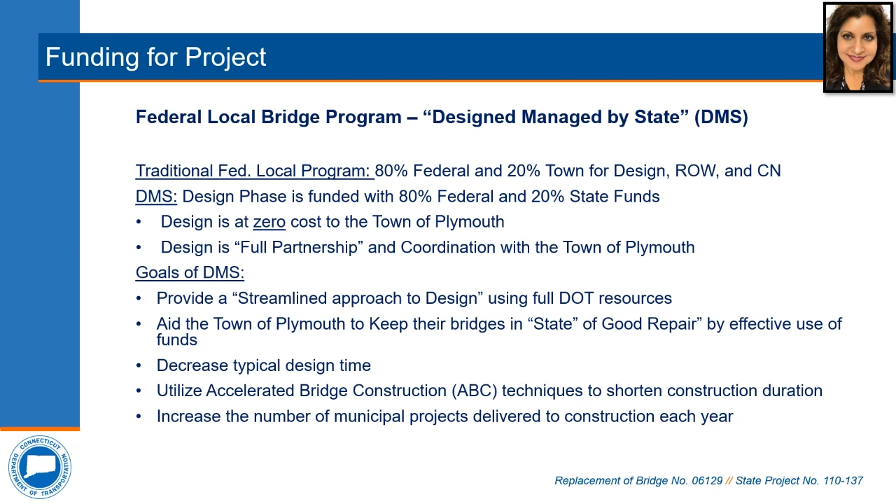While the Napco Drive Bridge may not presently be your vision of a bridge, it does meet the size requirements to be considered a bridge. Therefore, the Connecticut Department of Transportation performs safety inspections on this bridge every 2 years. The Napco Drive Bridge was flagged during those inspections as one of the bridges in town needing repair. We knew that the bridge needed to be completely replaced and were looking for the most efficient way to proceed.

Traditionally, the town would have to hire a consultant to develop the plans and then navigate through the design process, with the town covering 20% of the design cost. As Preeti mentioned, the Department of Transportation offered the DMS program to the town. We started talking with the state in February of 2020 to get an understanding of how the program worked and how it may benefit the town.

After several more meetings with the state, the town recognized this would be a good joint effort and agreed to move forward. We felt it was a win-win solution for the town since the state pre-selected consultants who would have a better knowledge of the design process, resulting in an early completion of the design and construction, not to mention cost savings. Over the last year and a half, a lot of information gathering and preliminary design has taken place

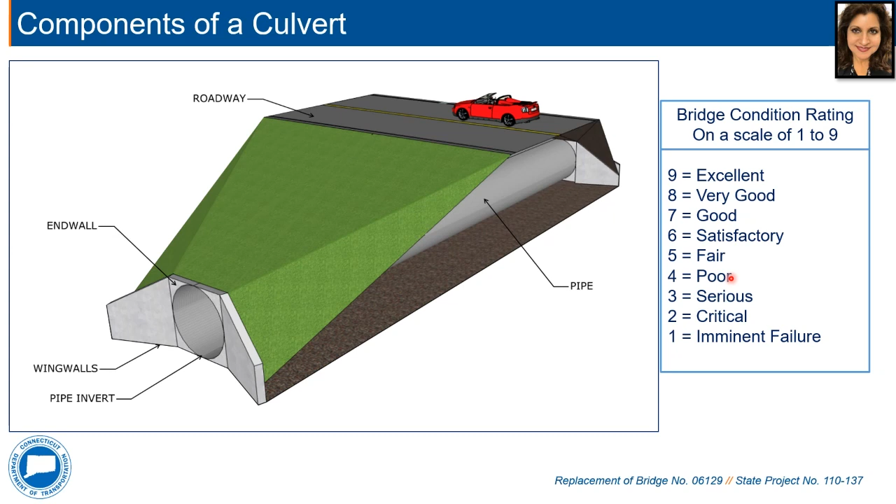Thank you, Preeti. Good evening. My name is Sean Ladowdy, and I will be presenting the technical portion of tonight's presentation of Bridge 06129, Napco Drive over Pequabuck River in Plymouth, Connecticut.

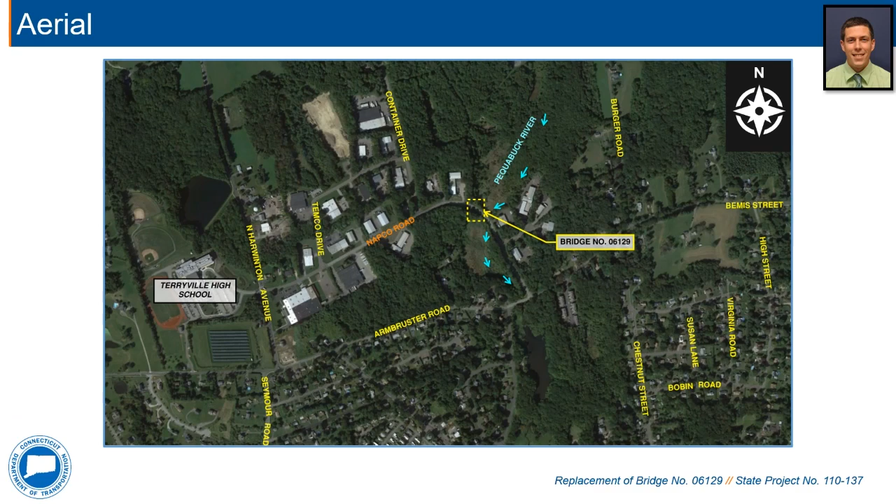Here is an aerial view of the project site showing Napco Drive, the Pequabuck River, Terryville High School, and the surrounding streets. This slide depicts a plan view of the existing bridge. The Pequabuck River is shown in blue, and the existing bridge is shown in orange. The Pequabuck River is the main branch to the east, shown here.

A tributary connects the river just upstream of the bridge, which is shown here.

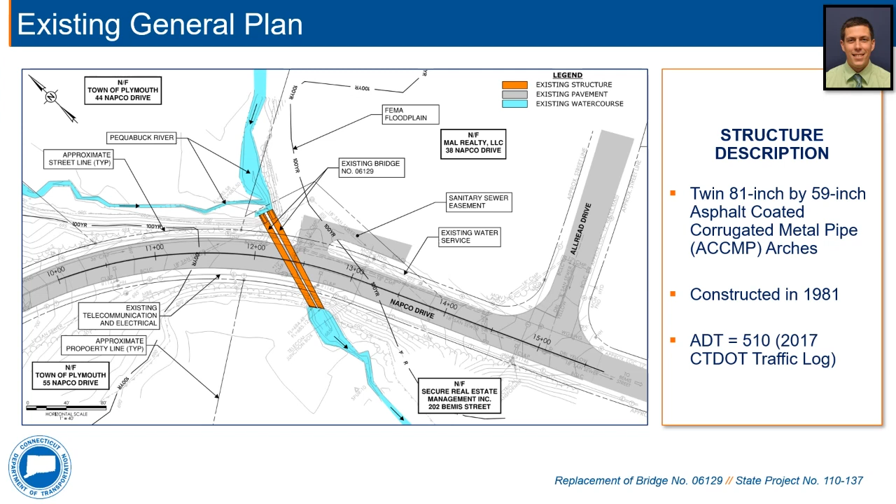The existing structure was built in 1981 and consists of twin 81-inch by 59-inch asphalt-coated corrugated metal pipe, abbreviated as ACCMP, arches. The pipe arches are aligned at a skew angle of approximately 42 degrees with respect to the roadway above. The average daily traffic, or ADT, along Napco Drive is approximately 510 vehicles, based on the 2017 Connecticut DOT traffic log.

This slide depicts a typical section view of the existing structure. A typical section shows a view of the culvert as if the earth was sliced like a piece of cake at the center of the pipe. The structure is approximately 110 feet long and is shown here in orange.

The existing pavement section is shown in yellow, and the guide rail is shown in gray. You can see Napco Drive carries one lane of traffic in each direction and consists of two 15-foot travel lanes. The curb-to-curb width is 30 feet, and there are no striped shoulders along Napco Drive.

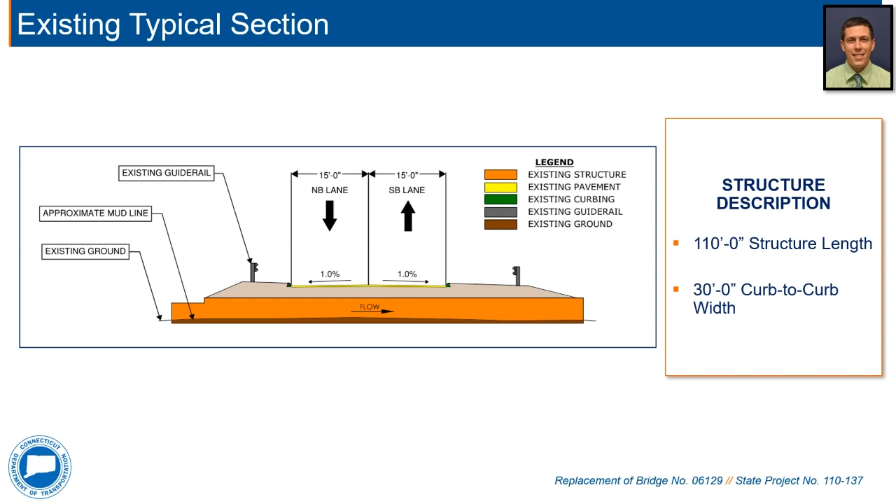The existing structure is not hydraulically adequate. The Connecticut DOT drainage manual classifies the existing bridge as an intermediate structure with a 100-year design storm event and a 500-year check storm event. For the 100-year design frequency, intermediate structures are required to provide 1 foot of freeboard to the upstream control point. For this bridge, the upstream control point is the road's low point, located at the approximate center of the existing pipe arches. The 100-year design storm's water surface elevation is approximately 9.5 inches above the roadway.

This slide shows the project area at street level. In the photo on the left, we are looking south on Napco Drive from the approximate location of the structure. In the photo on the right, we are looking north from the same spot.

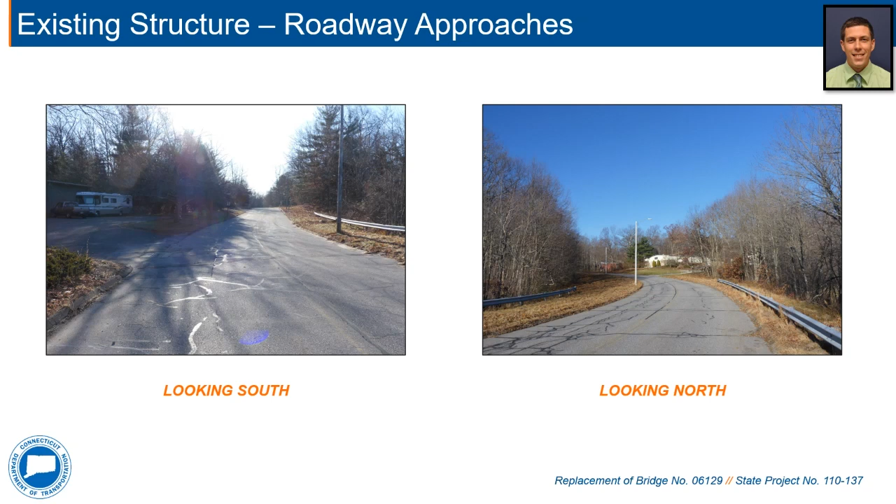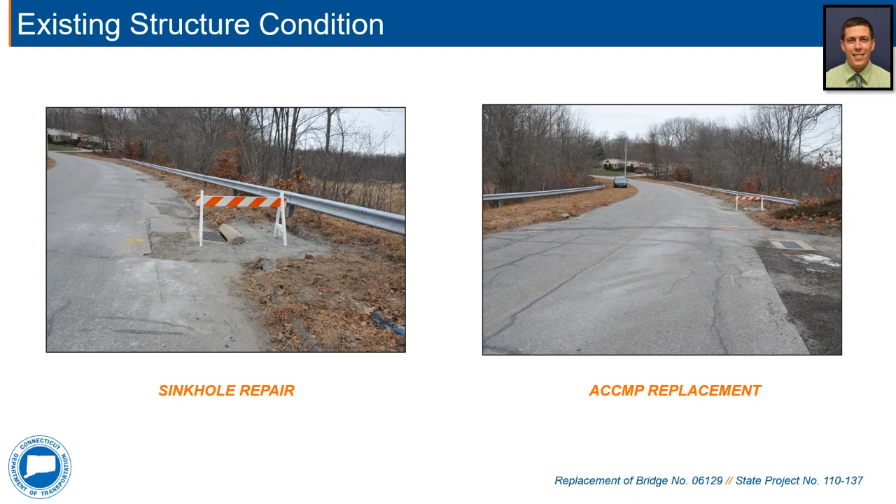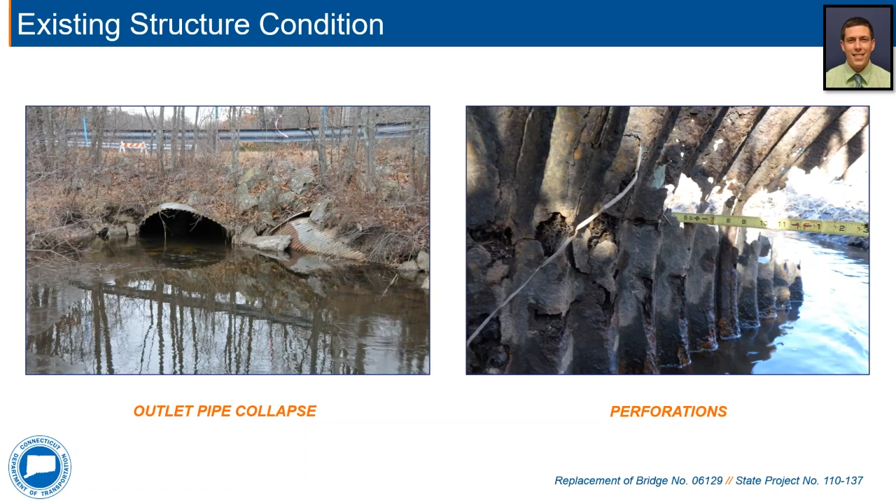This slide shows additional photos of the existing condition of the structure. The photo on the left shows the outlet elevation of the pipe arches where the southern arch collapsed. The photo on the right is an example of the perforations in the pipe arches.

The purpose of this project is to address the structural deficiencies of the existing twin ACCMP arches. The latest inspection report, dated November 19, 2019, classifies the structure as structurally deficient due to the condition of the existing culvert. The culvert was rated a 3, indicating the culverts are in serious condition. This is primarily due to areas of coating loss, section loss, perforations, and rust holes.

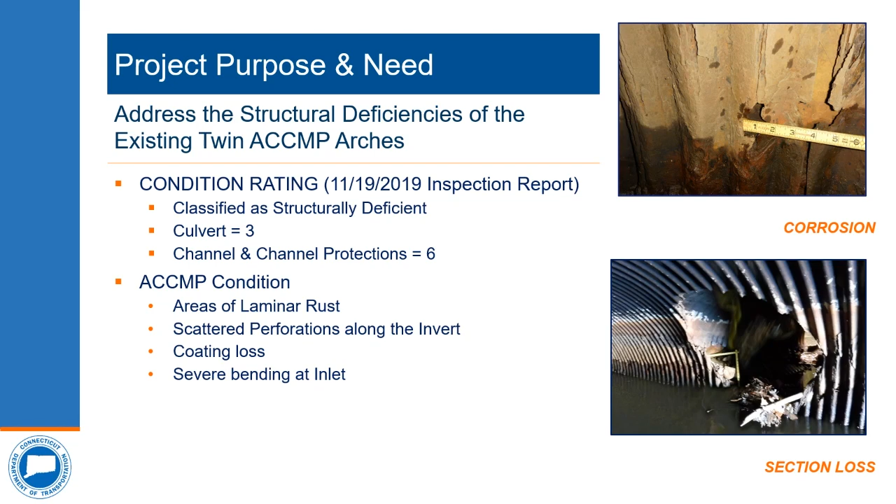The existing water main, shown here, will need to be permanently relocated during construction in order to accommodate the proposed structures.

The existing telecommunication and electrical conduits located along the western side of Napco Drive, shown here, will need to either be temporarily relocated or supported and protected in place during construction. The existing conduit bisecting the northern ACCMP arch, shown here, will be permanently relocated during construction.

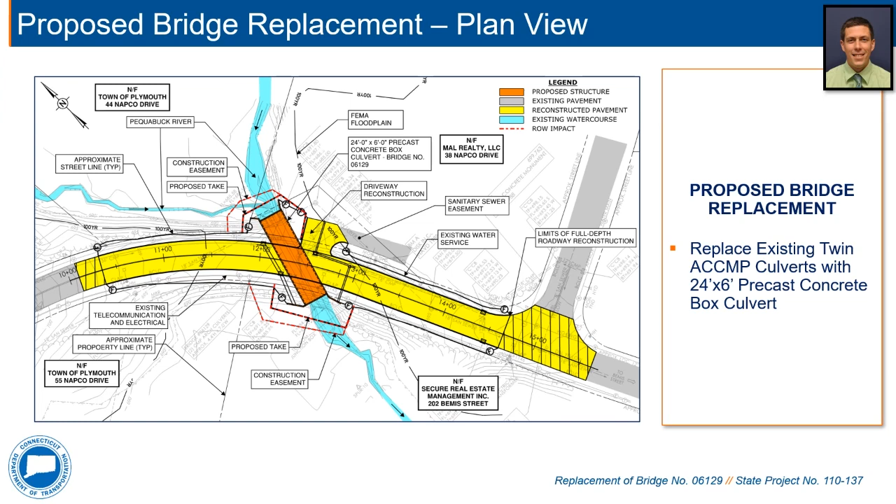As previously noted, the curb-to-curb width will be maintained. The roadway width will accommodate an 11-foot travel lane and a 4-foot shoulder in each direction. The shoulders will not be striped to match the existing roadway. The shoulder and clear zone were evaluated and it was determined that the metal beam rail was not warranted.

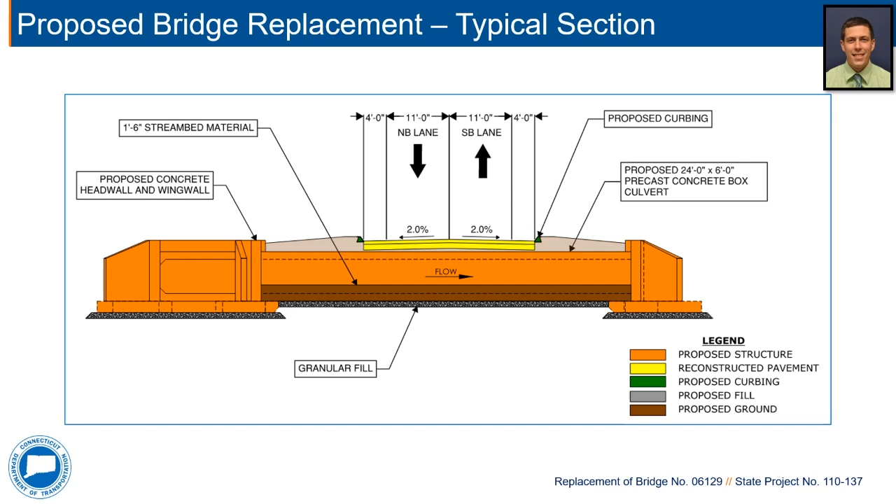Chain link fence is proposed as protective fencing along the head wall and wing walls of the inlet and outlet, but is not shown on the section or elevation for clarity.

The next slide is the elevation view of the box culvert. The view shows the proposed structure in orange and the stream bed material in brown. Chain link fencing is proposed along the head wall and wing walls, but is not shown for clarity.

The proposed replacement will be hydraulically adequate and provides a minimum of 1 foot of freeboard to the upstream control point. The vertical profile of Napco Drive will be raised approximately 1 foot at the bridge. This will help create a hydraulically adequate bridge and provide proper cover for the structure and utilities.

It is anticipated that a road closure of up to 4 months will be required to complete the construction of the proposed bridge replacement. Access to the driveway in the direct vicinity of the bridge will be maintained for the majority of construction, with temporary closures required for certain activities. The adjacent driveway has a back entrance that may be used as a primary entrance for short durations.

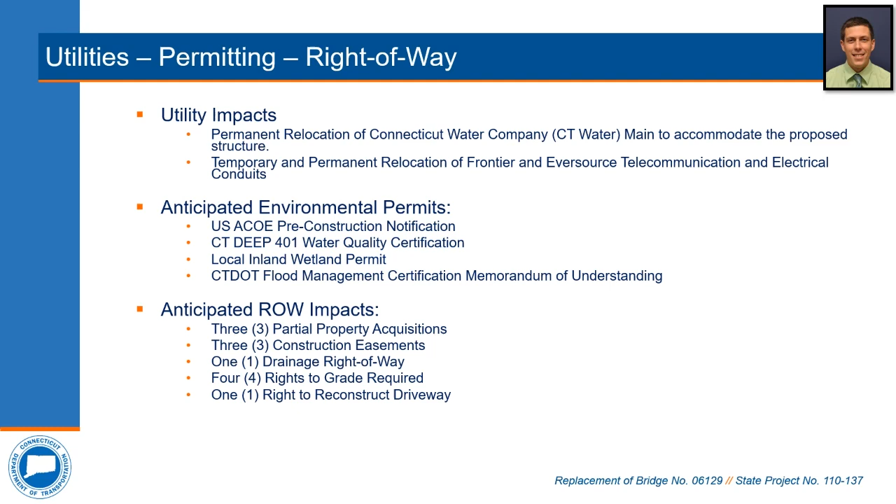The function of the Division of Rights-of-Way is to acquire all property and property rights necessary for the project. This is done in accordance with Connecticut General Statute Section 13A-73, 13a-98e, and the Uniform Relocation Assistance and Real Property Acquisition Policies Act of 1970, as amended.

The typical right-of-way impacts include partial acquisitions, easements, and rights. Impacts are subject to change as the design progresses, but this gives a general idea of typical property impacts.

Once property impacts have been established, each impacted property owner will receive a letter of intent to acquire along with a property acquisition map. The letter essentially initiates the right-of-way process, and the map provides a detailed overview of the specific right-of-way impacts. Soon after the letter is received, an evaluation process will take place, and once a value has been established, each impacted property owner will receive a written offer of compensation.

Property owners will be given time to consider the offer and negotiate should they wish. If an agreement is reached, an acceptance document will be signed, and a closing will take place at a later date. If an agreement is not reached for whatever reason, the state will utilize its power of eminent domain and acquire the property rights through the condemnation process.

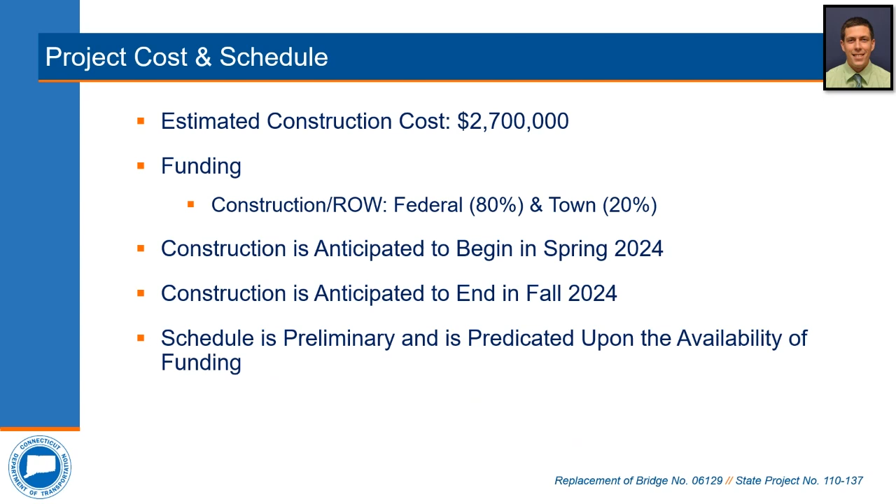All right, this question came in via email. It says, instead of detouring the traffic to Armbruster Road, a residential area where many drivers speed, can you place detour signs on both directions of Route 72, directing vehicles to Preston Road, Terryville? This is a more direct route to the industrial park, and detour signs in both directions on Route 6, directing traffic to North Harwinton Avenue. Terryville High School is located near the industrial park, so there will be much more traffic on Armbruster Road from staff, students, and parents. Let's keep tractor trailers out of the mix on Armbruster Road.

BL, to kind of compress that, the question was generally, can you place detour signs on both directions of Route 72 directing vehicles to Preston Road? Again, this is from the valuable BL Companies. The proposed detour is intended just for daily truck traffic, whether it be shipments or local traffic. It's not intended for through trucks. It's really intended for vehicles to get basically from one end of the bridge to the other during construction. Currently, Bemis Street is posted as no through truck traffic, so therefore we weren't anticipating having that be part of the detour to have the trucks on that through route. Additionally, further south of the project, the turn from Bemis Street onto Harwinton Avenue would be a difficult maneuver for the trucks to make. So that was also some reasoning why we went with the detour.

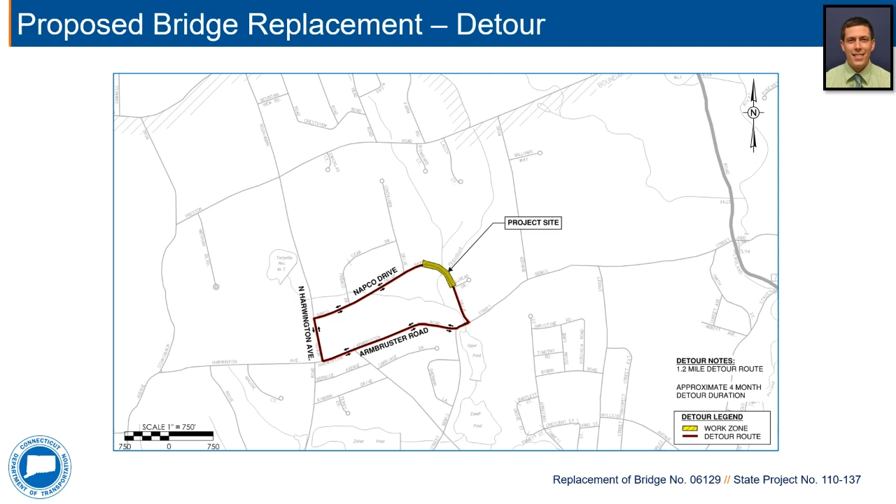Do you have a plan to prevent beavers from damming up the area? What are the plans to prevent this from happening again? The beavers will come in time. Let's prevent the demise of future beavers. BL, if you could address that, please.

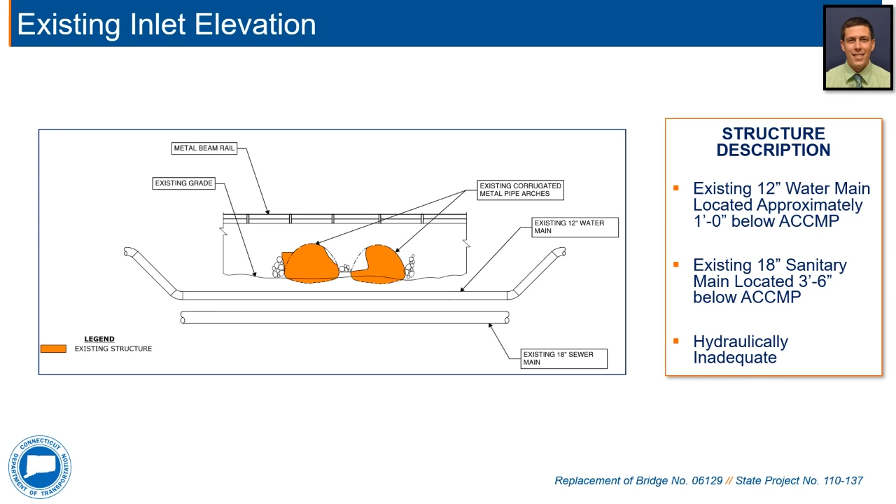Yep, this is Sean Ladati with BL Companies. The existing bridge is two pipes approximately 6'10" wide and 4'8" high. They are generally in bad condition and collapsed, so it's even reduced area than the actual width listed. The new proposed structure will be 24 foot wide by 6 feet high, which is a significantly increased area, and it would be harder for the beavers to make dams.

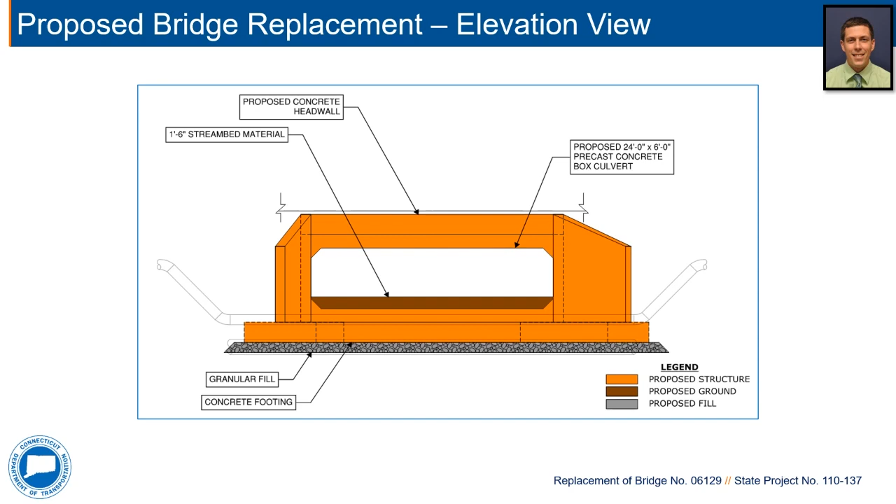At this time, there's no additional preventative measures planned. Okay, thank you, Sean. I think that's all we have for questions at the moment. We'll keep the chat open for a few more minutes.

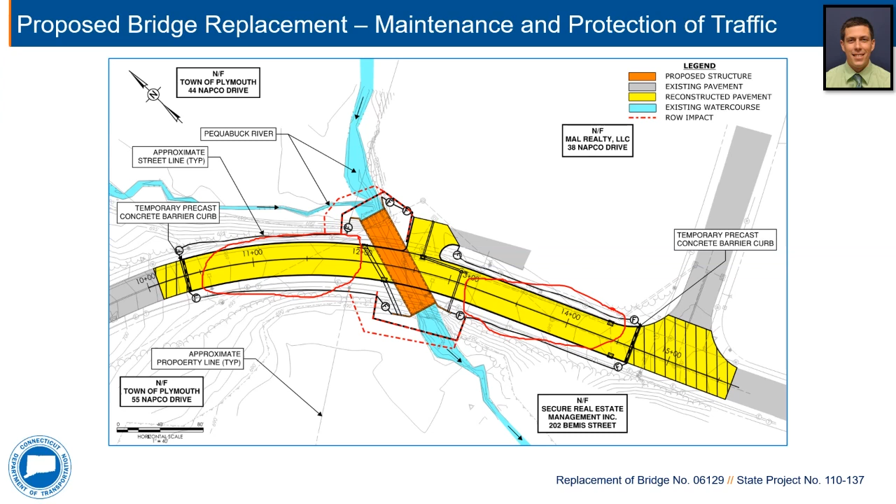Great, thank you very much, Sean. The next question that was asked was, how long will construction take, and can construction be expedited?

Sean, yep, if you could answer that. Yep, this is Sean Ladati with BL Companies. We are anticipating this to have a 4-month duration for construction. This could be expedited by using precast concrete head walls and wing walls, and we will explore that as the design progresses.